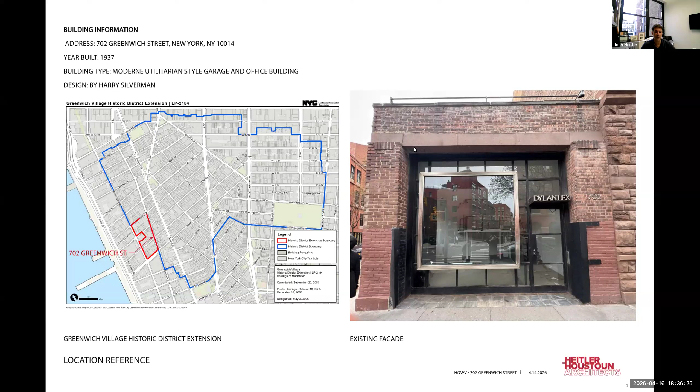is intended to be more historically and contextually sensitive and coordinate more with the existing details of the building, as well as providing security to the new tenant, which is a jewelry store. So they have some requirements on size of lights and other things that's part of their security program. And we're going to walk through a couple of the elements and the precedent we looked at, looking around the neighborhood to try to ensure that this would be more historically and contextually accurate.

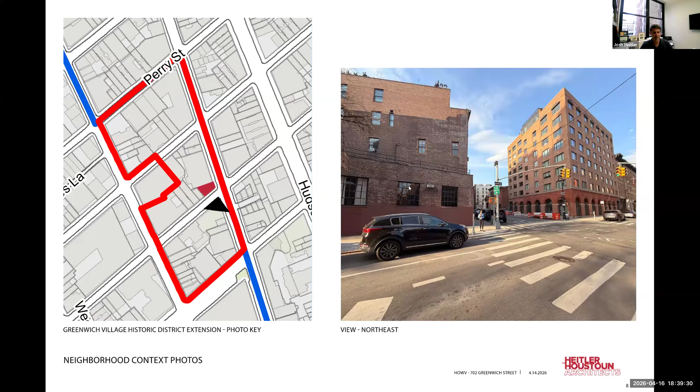Again, the facade we're talking about is around the corner here, but this is the side of the one-story building, which also has multi-pane black metal windows. And then this is looking away from the property down the block for context.

And again, we started to look at similar conditions in the neighborhood. So this is the immediate neighbor. The subject property is in red. This one we're looking at here in black is 708 Greenwich.

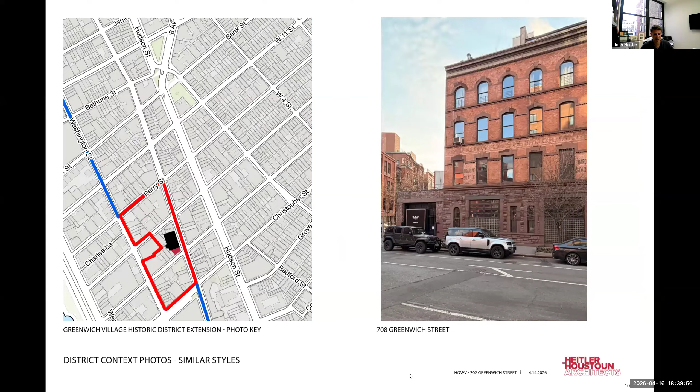And here's a close-up of their infill treatment. They're using a combination of multi-pane glass block.

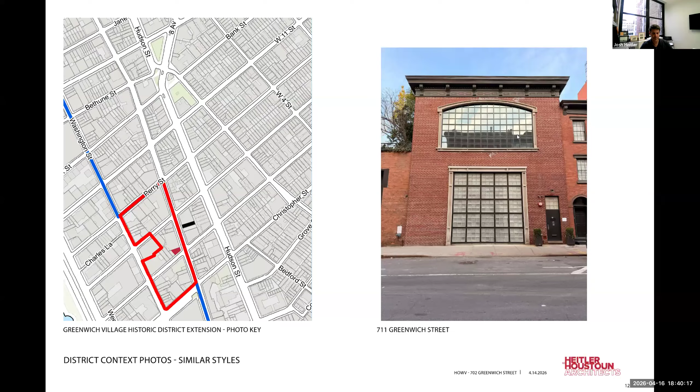This one is across the street. They have, again, multi-pane glass block. In the upper section, they have a very similar treatment of multi-pane storefront. And that's just a close-up of their infill. This is a couple blocks away, but of similar condition as a one-story multi-pane garage infill.

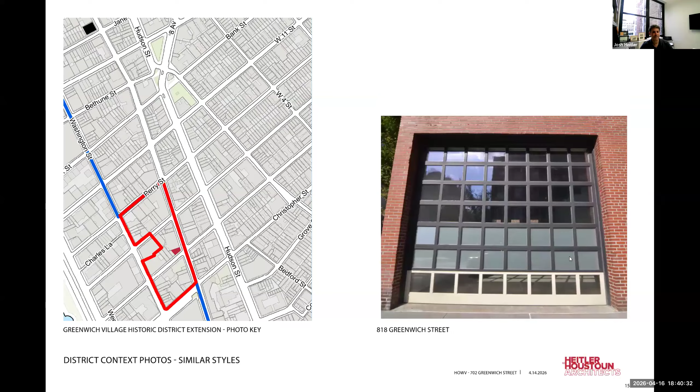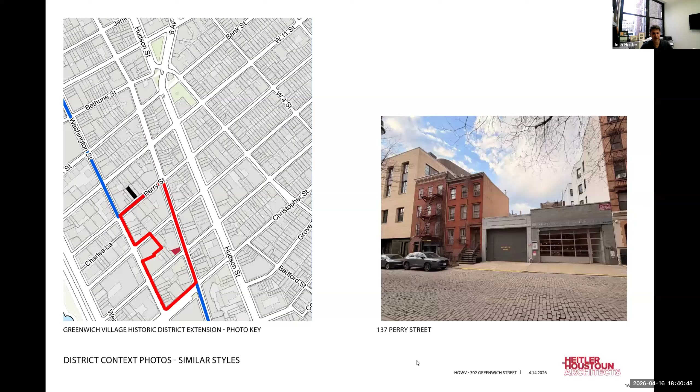And we also looked in the neighborhood for garage-type facades that had pedestrian entrances incorporated into them. So this is around the corner on Perry Street. You can see here, I think we have a close-up, that it's a garage-type storefront with an incorporated pedestrian door.

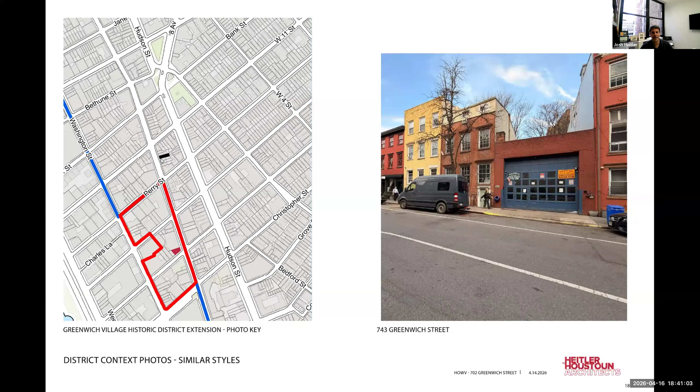And a similar condition exists, I believe. This is further up Greenwich over here, 743. This is an active garage, but it too has a multi-pane facade and an operable pedestrian door within the pattern.

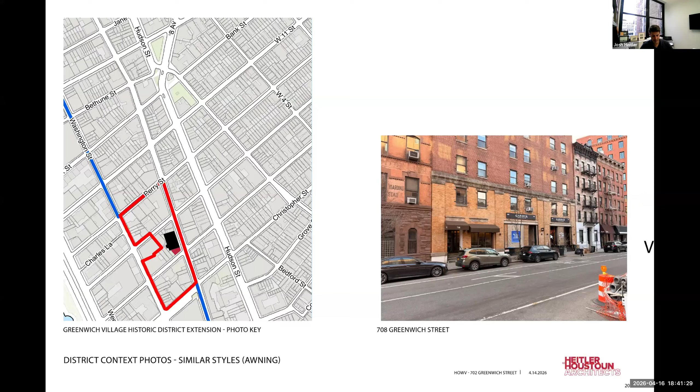The other piece we wanted to look at were awnings. The owner is also wanting to do an awning here. So these are the adjacent properties on the block, several simple fabric awnings up the street at 708, and further down the block at 716 and 718. Close-up of them.

This is a plan of the tenant's portion of the building. There's an apartment to this side, but this is the tenant space. And then here is the proposed storefront and door shown in context and plan.

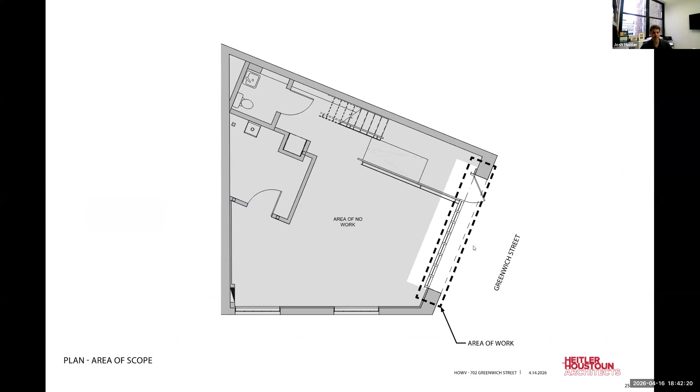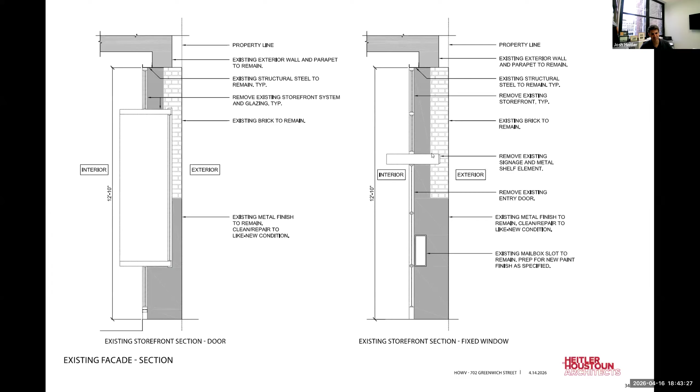Some of the details, again, this is existing, which has this sort of large picture window element and these projections. And then the proposed, which is much simpler and flatter and sits back from the historic opening.

And then this is shown with the proposed awning. The awning also is within the opening and set back so that it minimally protrudes past the face of the existing building, actually more or less aligns with the existing building. So very much within that existing opening.

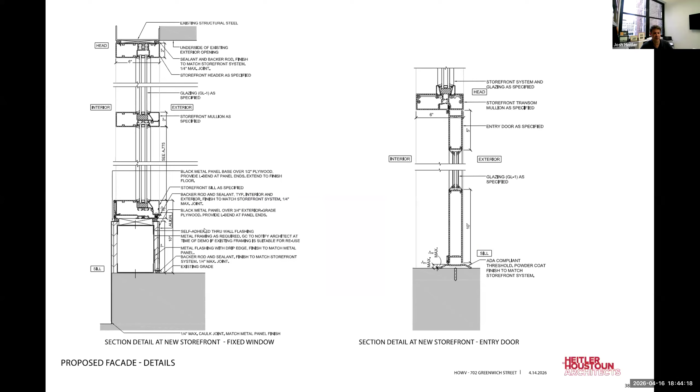Some more detail on the awning. These are some construction details of the new storefront system. We are keeping the existing structure that frames it on three sides, four sides, including the bottom, and just building the new storefront, replacing it sort of one for one.

Some more details here as well. Finally, our intent is to remove the existing deteriorated storefront that we don't feel is particularly historical or contextual, and replace it with something that preserves the existing opening, but is more historically appropriate and more contextually sensitive, that also meets the requirements of the tenant. Any existing elements to remain will be repaired in place and preserved.

That's it. Okay, thank you.

Could you go back to the awning, please? Certainly. Let me just—this one? Looking at the section, how high is it and how far does it extend from the building? So the bottom of it is 9 feet off the ground, and it doesn't actually extend past the face of the building. No, the height of the awning itself.

The height of the awning itself is 3 feet 10 inches. I didn't hear clearly—3'10", I'm sorry. How high? I didn't hear how high it is. The awning is 3 feet 10 inches.

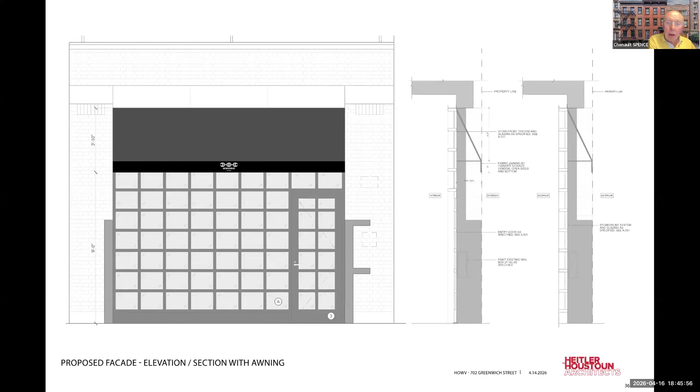And it extends to the edge of the building. It's about 18 inches per the projection, but that is the same amount as the building. Going to the side view, it starts at the facade at the new storefront line and ends at the base of the building, so it's inset, as it were. And it's fixed, I gather. It is fixed.

From the committee, are there questions? Anita, do you have any questions? Yeah, I have two questions. One is the glass mirrored? No, the glass will have a security film on it, but that security film will be clear in nature.

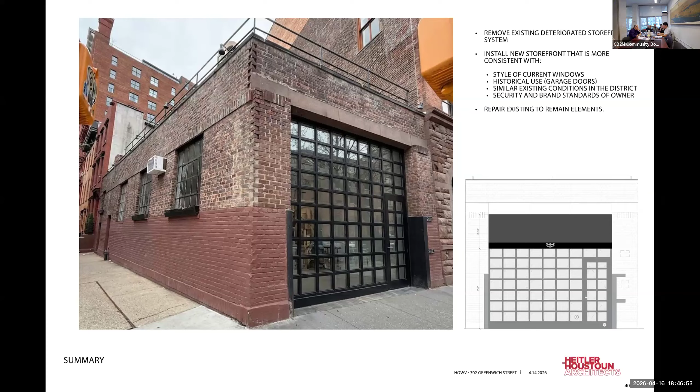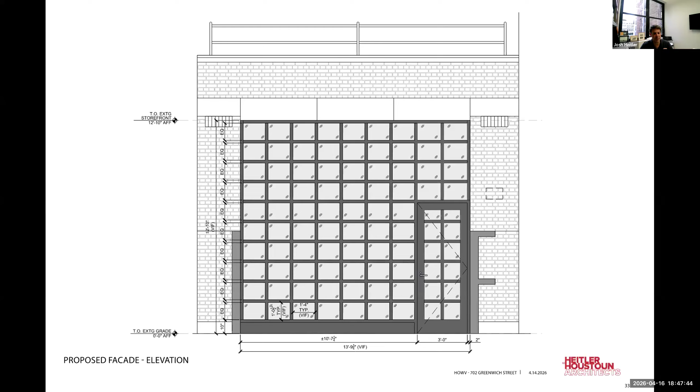And the size of the divided lights, where did you get that size from? They're kind of horizontal. The size is they are a little over one foot high and about 16 inches wide. That came from a couple of things. One, we were trying to meet the security requirements for the tenant—being a jewelry store, the idea is that even if you somehow break the glass, these would remain and be at a size that was not easy to fit through. And we looked more at the garage doors we had seen in the neighborhood in terms of that proportion, and they were mostly horizontal to square. I can go back and find some of them, like these ones. These were very horizontal, but I think most of these we found were horizontal to square, so that's what we were sort of echoing.

I have a question, which is: is there any illumination of any sort that's part of this application? No, there's no proposed illumination.

I also was going to ask the same question about the mirror quality—can we just assume that this is a function of the render, and that whatever this clear film is does not have any additional reflective property? Yes, correct. This has been a concern of Landmarks as we've been working with them. If we're able to gain your approval today, we'll go in front of Landmarks in early May, and they've asked for physical samples of the film because they have the same concern. They've said in the past that they've approved clear security films, so this is something that exists. We're hoping there's a solution that works for both the client and Landmarks, and we understand yours and their concern that it not be mirrored or reflective.

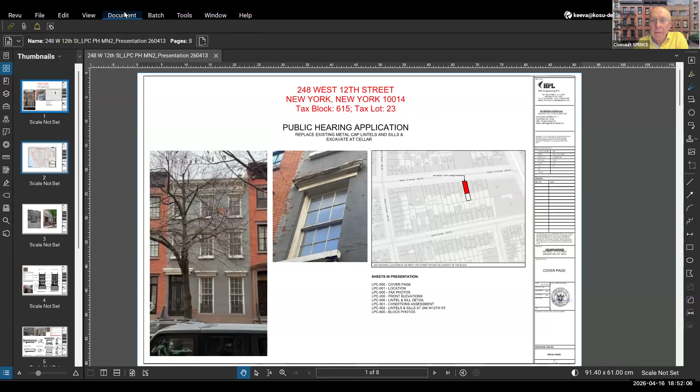Okay, that should be showing for everyone now. We see it, thank you. Okay, perfect. Hi, good evening. My name is Keeva O'Sullivan, and I'll be presenting today on behalf of the building owner at 248 West 12th Street. Excuse me, can you make the picture full size? We're getting thumbnails. No problem. There we go, thank you.

My name's Keeva O'Sullivan, and I'll be presenting today on behalf of the building owner, Carlos Saavedra. Our application today is short, and it addresses the replacement of the existing metal cap lintels and sills at 248 West 12th Street.

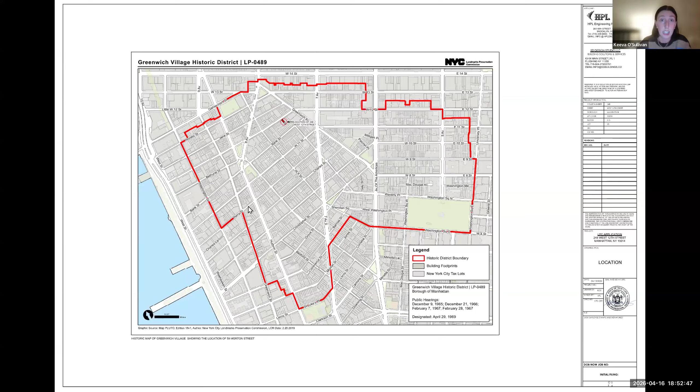As many of you are aware, 248 West 12th Street is located in the historic district of Greenwich Village. Here we have a map of the neighborhood showing the location of our property, up in the top north of the map.

I will also note at this point that we have already received LPC approval to remove the paint from the front facade, so the proposed brownstone details will complement the newly revealed brick nicely and support the wider restoration of the front facade to its original conditions.

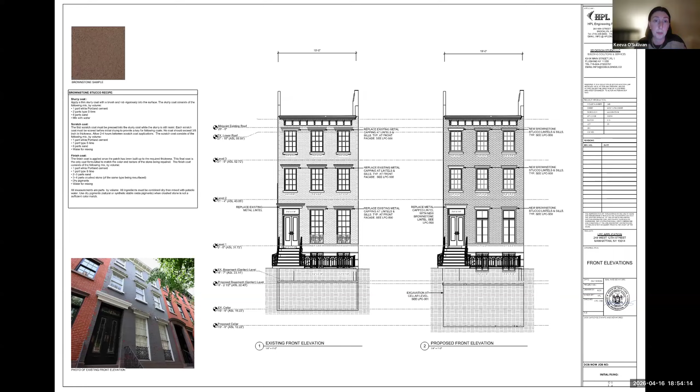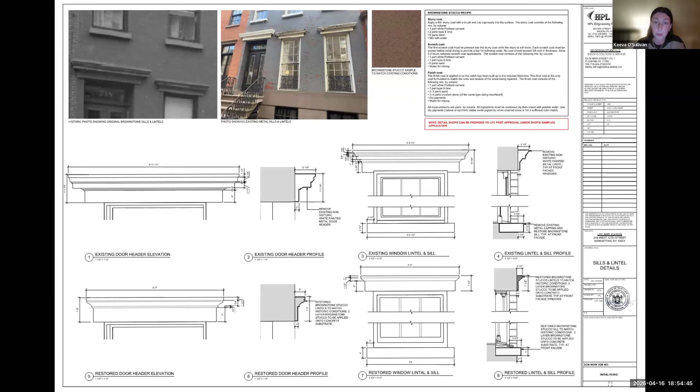I will emphasize that we did carry out a thorough conditions assessment of the existing metal cap lintels and sills prior to making any proposed amendments. As you can see from these photos, the existing metal caps show severe wear, particularly evident on the lower floors, where you can see considerable peeling and delamination of the paint.

With that, my presentation is concluded and I'm happy to take any questions.

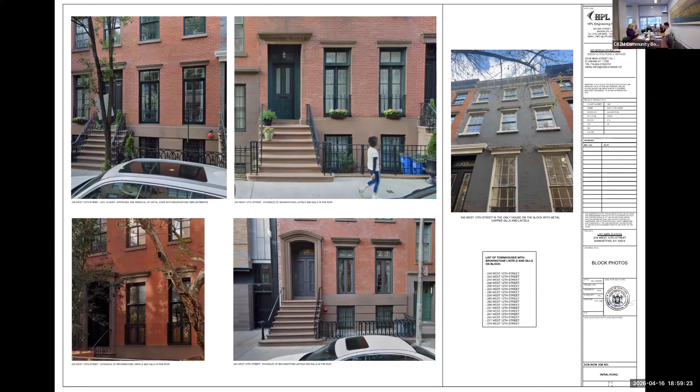The next application is 639 Hudson Street, to replace all existing windows, reclad the penthouse, straighten a wall on the roof, relocate 3 chimneys, and remove the roof deck.

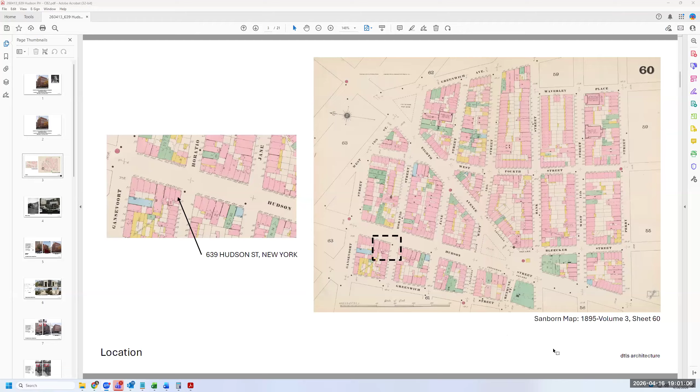In the 1940s, it was a parking area. In the 80s, it was a maintenance garage. But more recently, in 2003, Landmarks approved the proposal for a new building. It's 4 stories with a penthouse, and it's a mixed-use building.

What we wanted to focus on today is the top of the building. When you look at the building today, you can see there's a parapet cap and a visible penthouse clad with stucco. You can also see some of the mechanical ducts, which are visible as you move north on Hudson Street.

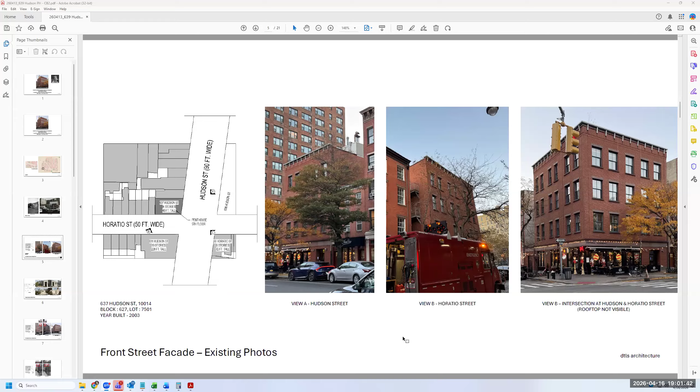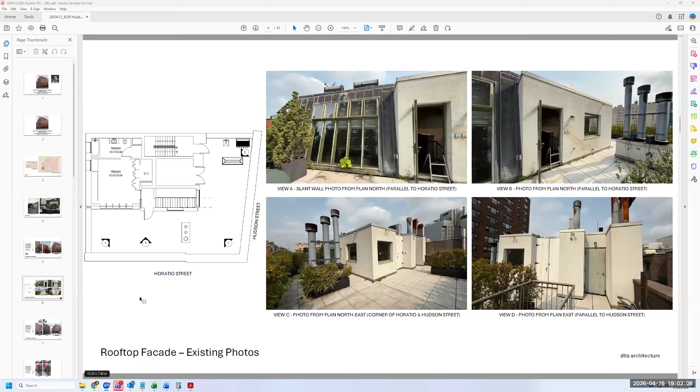Zooming in on the actual penthouse itself, it's a patchwork of different materials and openings. There's very little design intent to the way it was arranged, and it's fallen into disrepair. As you move around the deck, there are 3 chimney stacks which break up the continuity and flow of the deck itself. We wanted to create a proposal that creates order and rationality to the roof of the building.

We prepared a full-size mock-up, which is still visible today. If you see what's been built in the mock-up, it's only a modest change to what's visible from the street, so you really have to go down Horatio or up Hudson to see any of the modifications we're making.

When you go further east on Horatio, it still shows how little visibility you get of the bulkhead penthouse. Could you increase the size of these individual pictures? Of course. Is that better? Yes, please, thank you. Of course, and let me know if you want me to go back on any of them.

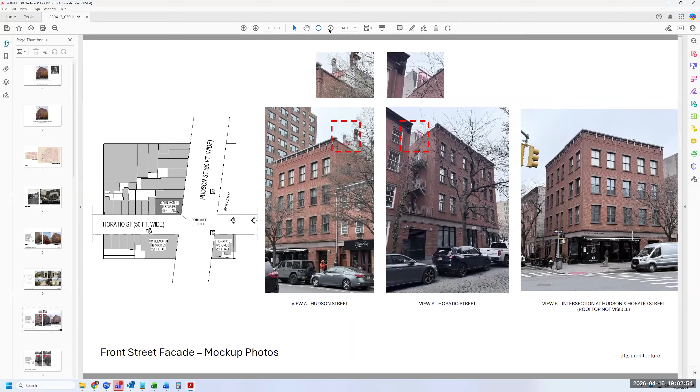If you look in this image, you can see that our proposal is only slightly accentuating the existing penthouse. I'd also like to reiterate that we're not changing any of the heights of the penthouse.

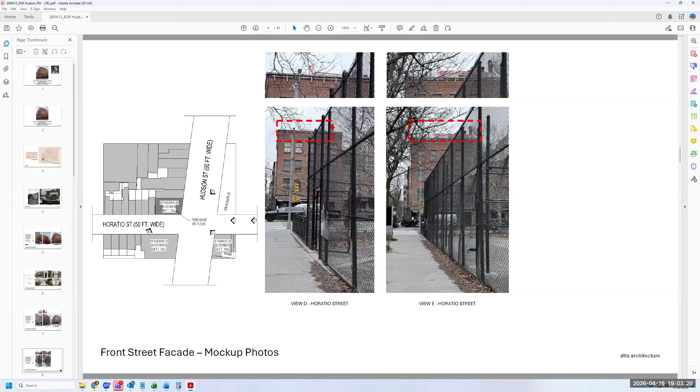When you move east on Horatio, you can start to see some of the chimneys, which are sort of floating in the middle of the roof. You can see some of the proposal, which we're placing on the east facade of the penthouse.

It's a more substantial difference when you get on the roof itself. What we're trying to do is create a more rational system of openings and geometry. By moving these 3 chimney stacks closer to the penthouse, it creates a more consolidated massing while making the chimney stacks even less visible from the street.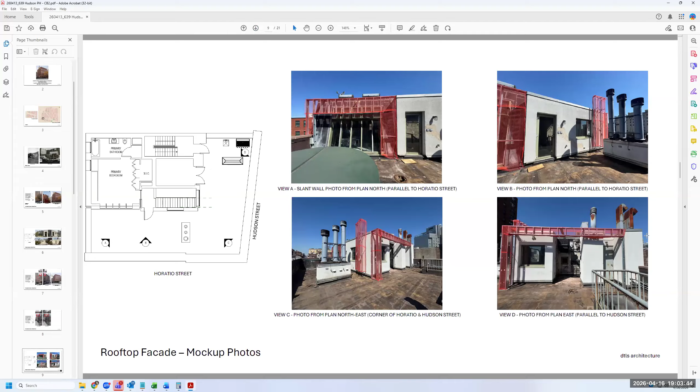We'd like to confirm that when you're standing directly across Hudson Street or Horatio Street, you do not see any of the penthouse. It's only when you go further east, north, or west that you can start to see it.

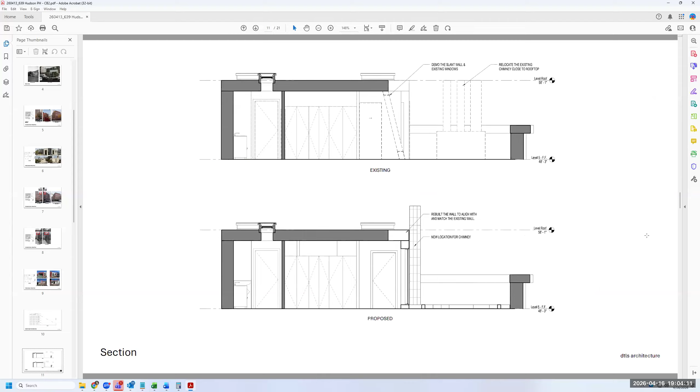Looking at our geometry, we wanted to create something more rational and practical, and also to have window openings that are more consistent with the rest of the building. By doing that, we were able to create new window openings and also a cladding system which is more reminiscent of the industrial heritage of the area.

Most importantly, moving these chimneys over creates less of a visual block between the east and west portions of the deck. We didn't want to end there though. We really weren't happy with the material of the current penthouse, so we wanted to find materials that were in the same rich heritage as the meatpacking in the West Village. We ended up using porcelanosa materials in oxide brown and Tourmalet black because we felt it would reinforce some of the industrial heritage of the site.

The other thing we wanted to do was create a sort of rational intention to the way the penthouse is designed. Right now it's a chattered line, and there's very little concept or intention to the way it was made outside of the practical realizations of making the space work. Our proposal is to create a sleeve that runs from west to east and creates a more unified facade when you're looking at it from within the upper deck or from outside the building.

Sorry to interrupt - if you go back one slide. While we're here is a good chance to get this: the actual size and footprint is not changed, and the only thing you're doing is pulling the skylight out and filling out to the existing wall line, the replacement window.

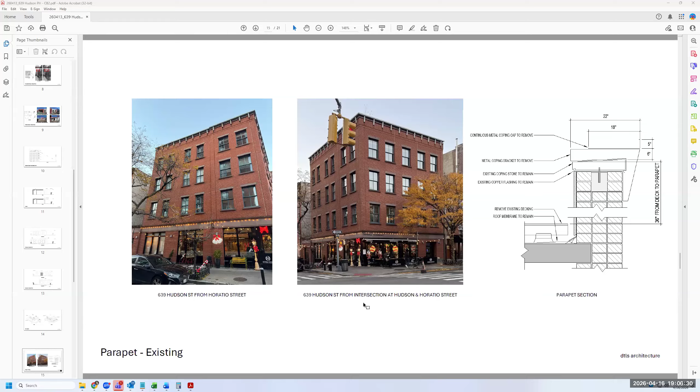The other item is that there's a metal parapet cap. I'd like to reiterate that this building was built in 2003, so it doesn't have any historic significance, and at this point the parapet cap has fallen into disrepair. Our intention is to remove it to create a more clean brick facade, as these images reinforce.

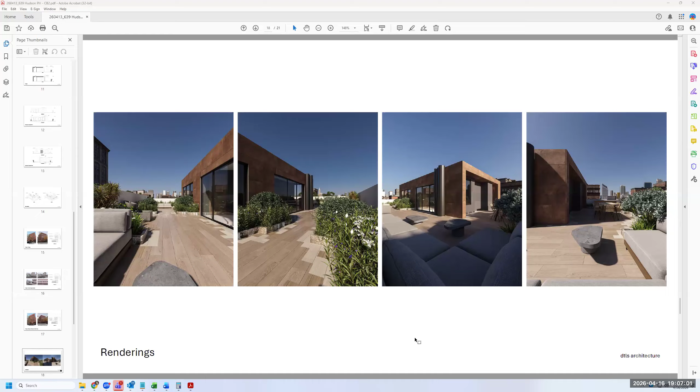The last and most important thing was to create a design that really has value for not only the building, but for the neighborhood as a whole. We feel that by reskinning this penthouse, it'll actually add more to the history of the neighborhood, as well as creating a more rational design that won't be as awkward to look at when you're in an adjacent building.

The material palette we've chosen was really pulled from the history of the neighborhood, but we also think this is a durable material that won't require as much maintenance and won't have the same wear and tear issues as some of the existing materials on the penthouse. Our window scheme is pulled from the window openings below so it'll have more consistency rather than haphazard openings currently in place.

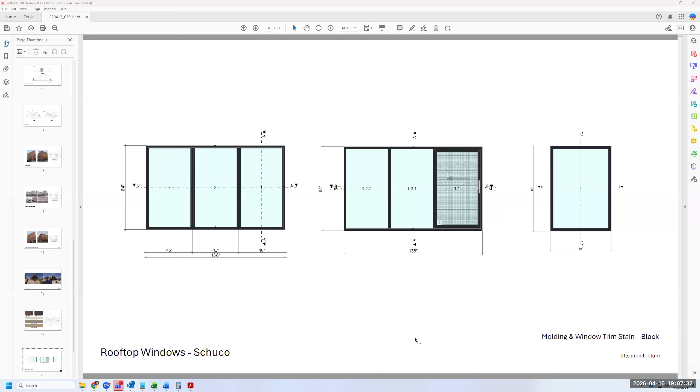Our overall intention is not to make a dramatic change for the building, but just to create something that's cleaner and more organized. We really love this neighborhood and we're really appreciative that you gave us the time to present. Thank you so much.

Okay, Susan, I have no other questions. You have no other questions? Okay, thank you for your presentation. Anybody on the committee have any? What's the material on the roof decking?

That's a great question. While Landmarks doesn't have much of a say in what we're doing, we still wanted to create material that was indicative of the concept for the roof. So we're going to be using pavers in three different materials, all cement pavers, but with different wood looks - some more bleached out and some with a more natural finish. They'll be sleeved together to create a filigree on the floor of the roof.

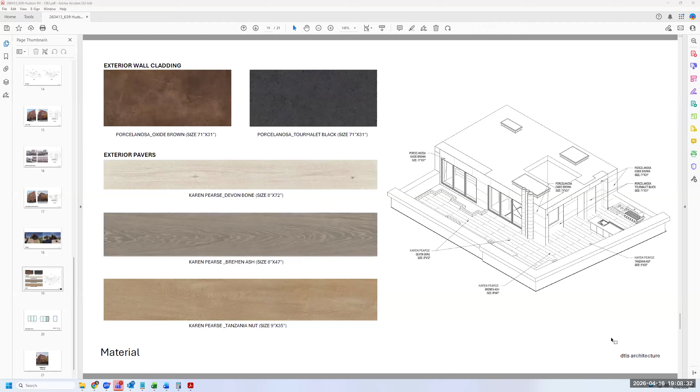Thank you, Mr. Barrick. I appreciated the presentation. I like that choice of the exterior wall cladding that you're showing there. I think that would be very effective.

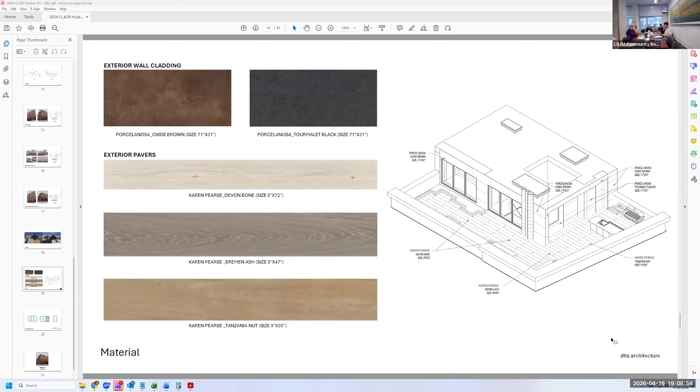My one question is about the coping and taking off that embellishment of a faux fascia. It's going to leave just a very thin line at the top of the wall, and I'm a little concerned about that. It seems like it's even thinner than the window headers, and that doesn't seem to be the right proportion. So I'm wondering if that top coping stone or material could be thicker to emphasize the top of the wall.

Actually, I think that's a really valid point. We've been working with our Landmark staff representative on how to approach this. We knew we were going to have to do repair work on this stone layer because the metal brackets are attached. So I think there's value in putting a thicker parapet cap around the perimeter of the building if we're replacing it. It would give it a bit more scale and proportion, and tie in with the other buildings a little better.

By the way, is that bringing the level up to the required height for a railing? That's a great question. Right now it's already over, so even if we removed it using the existing parapet cap, we'd still have an appropriate amount of guardrail height. And is it being kept for some design reason?

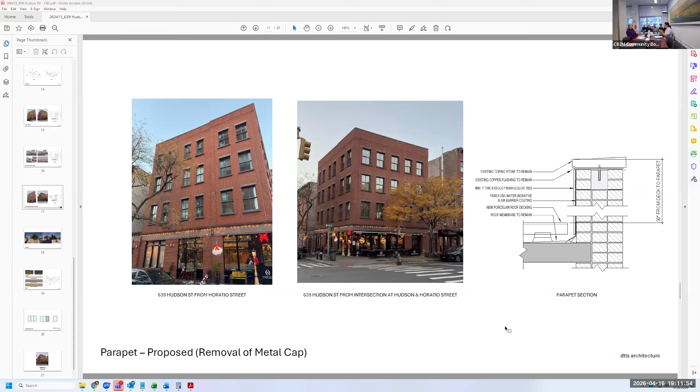Yeah, I just wanted to second what Brian was saying about the metal parapet. It does look a little odd without it, like the top was just removed somehow. Looking at neighboring buildings, what it maybe is trying to do is reflect the classical cornices in the neighborhood. So I would also call that out as something that doesn't really seem to match either the original building or the neighborhood.

Yes, on the same point, it looks bare. It just looks bare, like it's lost its cornice. We're sad when we see that because it doesn't celebrate how the building meets the sky, it doesn't give you a shadow line. So aside from removing it, which I can see is causing a lot of problems, I wondered why we couldn't get a new cornice that's easier to take care of and maybe more traditional.

This was kind of out-of-the-box thinking with the space and all of that. But you're saying it's a post-war building, though it wasn't designed to reflect that era, it was designed to fit in with the West Village massing and materials. So I would prefer if there was something new added back.

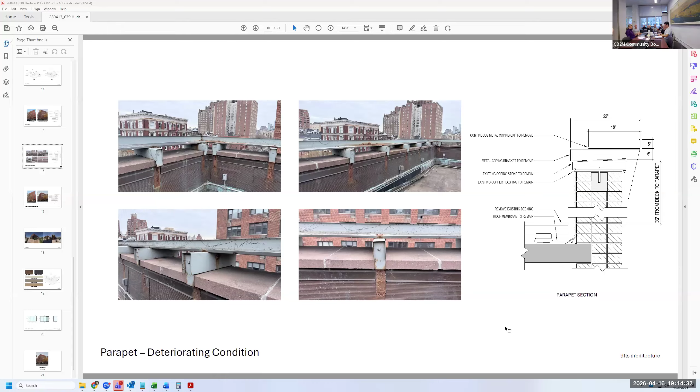Okay, thank you. Brian? Well, and likewise, we would also thank Laura for spending her time, energy, and talents rendering service to the community. Thank you. Yes, we all agree.

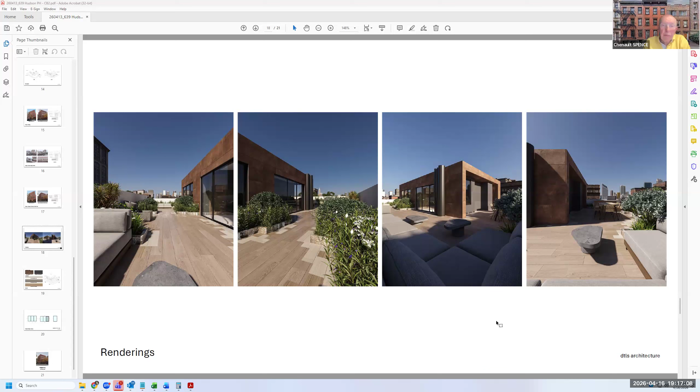The next application is 675 Hudson Street: to remove the billboard and construct a rooftop addition, modify the ground floor openings, and construct an exterior vestibule, and install new multi-light windows and louvers.

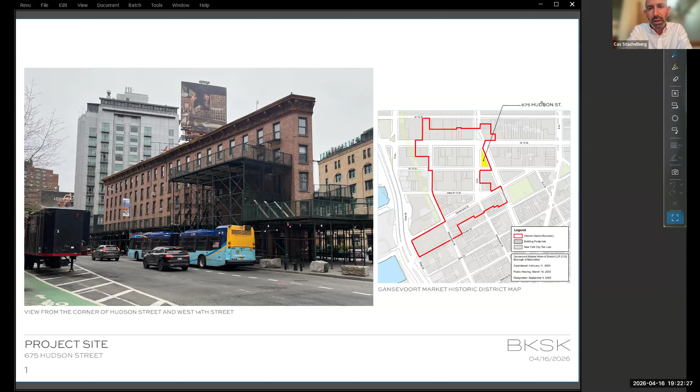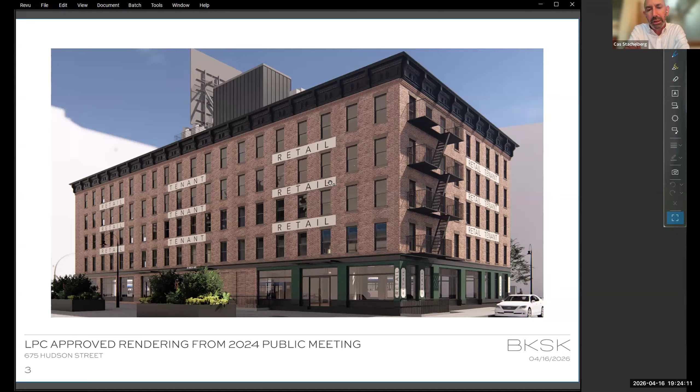Looking at the main volume of the historic building, as I mentioned, there's extensive restoration across all four facades, restoration of the cornice and removal of the billboard, and construction of a metal and glass rooftop addition with mechanicals and elevator bulkhead down to the south end, by the Gansevoort Hotel.

The design is really very much tied to the history of change in this district and supporting this new use. As you know, the district, since its designation in 2003, has been seen as this sort of design district in many ways, and the commission has regulated this district differently than any other historic district in the city. The designation report really acknowledges the differences that took place at the buildings in this district, particularly this notion of adaptive reuse.

Since the second quarter of the 19th century, buildings adapted to support new uses, whether market uses or other more contemporary uses seen in the 19th and into the 20th century, as well as this last phase of development the designation report speaks to, a sort of nightlife and vibrancy in this district that didn't exist when it was perhaps more of an industrial use. So this district has a different quality.

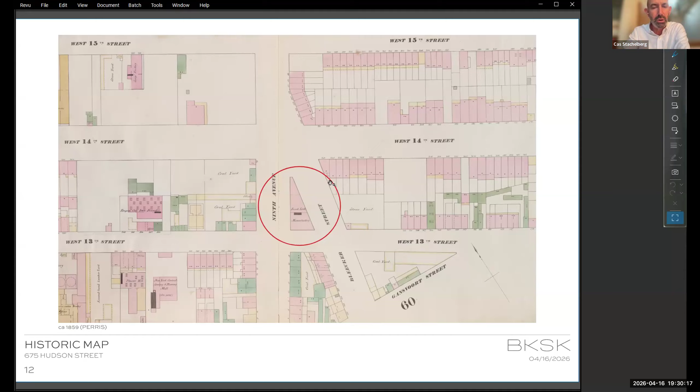A map from the 1850s shows the building in its complete form as it is today. We include this to illustrate the way the original building was detailed, sitting between a residential scale neighborhood to the south and east, with small scale, probably federal style houses, and an increasingly industrial neighborhood to the west with coal yards called out. But it seems, in its design and articulation, to almost have a domestic quality in its original detailing. Next slide.

Sorry, just getting rid of that. Next slide.

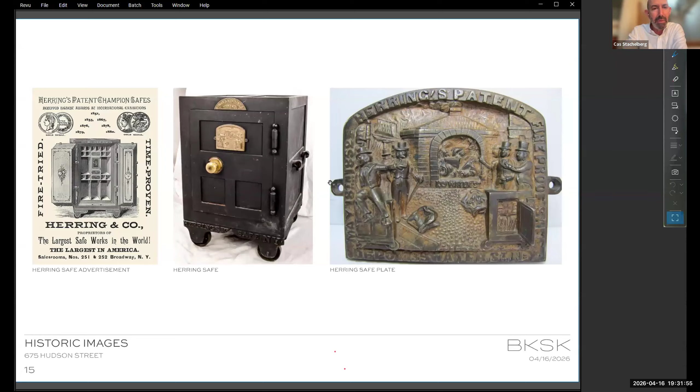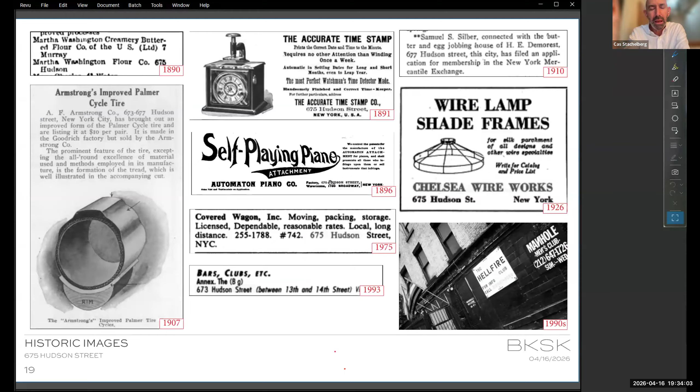Next slide. And then before I finish and Todd picks up, the designation report for the Gansevoort Market Historic District is a fantastic document. It speaks about the phases of evolution in the district and breaks down from the early 19th century to present day into four phases: the early development—conversion of residential scale buildings to industrial and market uses—the Gansevoort market phase, where buildings in the district were in service to the Gansevoort market just to the west, the meatpacking district, and then this last phase of development, the 1970s to the present.

It's not 1970s to 2000, it's to the present, and that's an indication of how the commission has thought about this district. It is an evolving district. It doesn't have an end to a period of significance; it continues to the present. And the commission has regulated the district and changes to it with that in mind. We include that photograph of 837 Washington Street to symbolize that.

Let's go to the next slide just to illustrate how the commission has looked at additions to buildings in this district—obviously very different than the district directly to the south in Greenwich Village and districts elsewhere in the CB2 area, as well as throughout the city. So, significant additions: this is one of the first additions in the district at the Diane von Furstenberg headquarters over on Washington and 14th Street. Next slide.

On 9 to 19 9th Avenue, this addition on this large scale 2-story brick parking garage. Next slide.

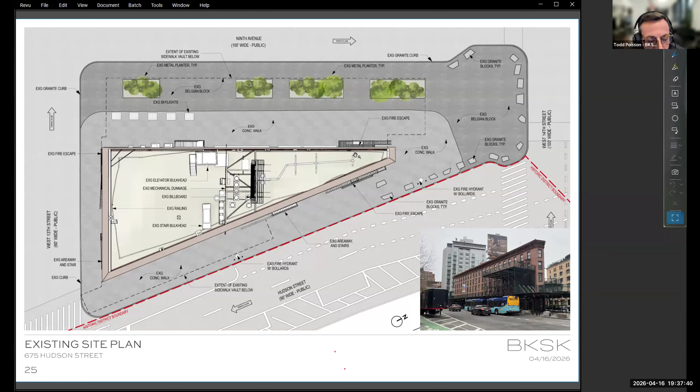The proposed conditions, rendering on the right, with the proposed roof plan showing our proposed scope from above: a metal and glass rooftop addition held off from the inside face of the restored cornice, the proposed new cornice now surrounding the full building, and the elevator and mechanical bulkheads anchoring the roof plan to the south.

We'll talk more later about the proposed sidewalk level scope in detail, but here you can see on the 9th Avenue side new retractable awnings on either side of a new proposed entry vestibule. You can also see shaded white on the Hudson Street side and elsewhere new sidewalk areaways in historic areaway locations.

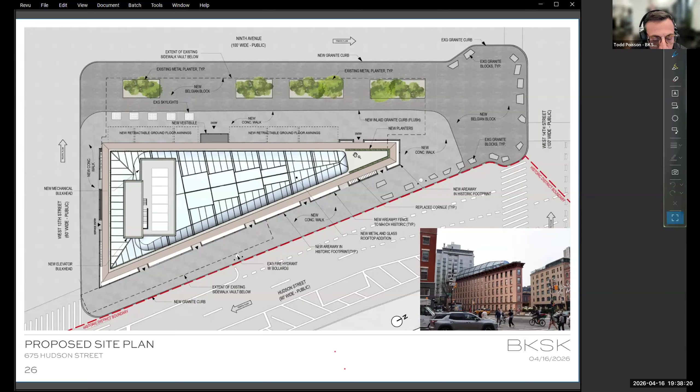All the windows are replaced, and among them are several louvers behind simulated double-hung window frames. The louver locations are the darker shaded windows under the cornice line at the north end. You'll see those on other elevations as well.

Similar items here to note on the Hudson Street facade. Again, we'll show more detail later about the proposed ground floor scope on all 3 major facades and how it recalls the building's 19th century condition, with areaways and a variety of windows and doors. Shown at the roof is the long eastern flank of the roughly symmetrical glass and metal bulkhead rooftop addition, and at the northern tip of the roof, powder-coated metal planters. The existing fire escapes are to be removed.

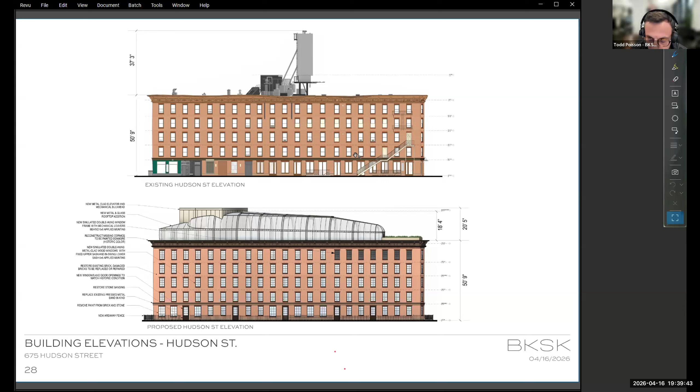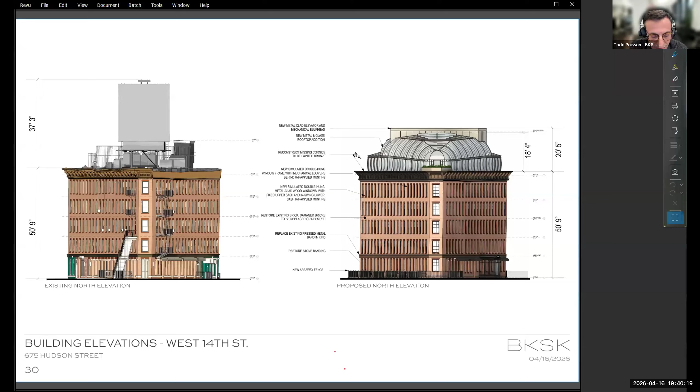When seen in pure elevation from the north, the rooftop addition's form can be seen to have been generated by the site's geometry, with the nose tapering down with triangular glass panels. You can also sense how the rooftop addition's glass volume billows out and curves down to that roof line, helping it visually separate itself from the base building.

Although not in the district, we've been inspired by historic metal and glass rooftop construction elsewhere and the tradition of enclosed rooftop garden spaces, such as the 19th century Casino Theater roof garden on Broadway. A signature space of Annabel's London, in fact, is the rooftop garden, and the rooftop space of our proposal aims to offer a similar signature space.

Now we'll walk around the building. The top existing conditions photo includes the mock-up of the rooftop addition, and the rendered street view is on the bottom.

Our intention for this reborn building is to really create a new symbolic gateway to the district with this restored landmark building base and an elegant glass enclosed roof garden on top.

The spacing and rhythm of the structural arches for the dome and metal details at the glass are drawn directly from the window spacing below, as well as from the staggered nature of the cornice brackets and panels.

And that cornice detail echoes in the ladder-like horizontal metalwork in the glass, which stitches the lower zone of the glass enclosure to the vaulted glass roof above, and also marks the top of the stair bulkheads at the south end.

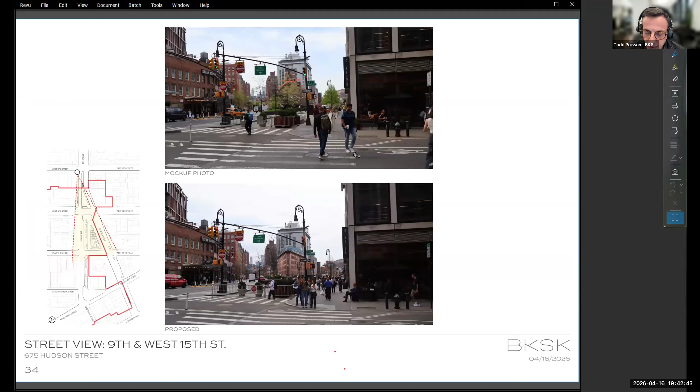From the north, where you can really see the sense of the triangular nature of the site and how it generates the form above. Zooming in a bit on that view, there's a small occupiable roof terrace at the northernmost tip of the roof behind the planters.

From the northeast, you could see the tapered form of the roof in section. The metal details along the long sides of the addition echo historic district details of elevated rails and other rooftop elements.

On Hudson Street, replacing the billboard with a tapered silhouette.

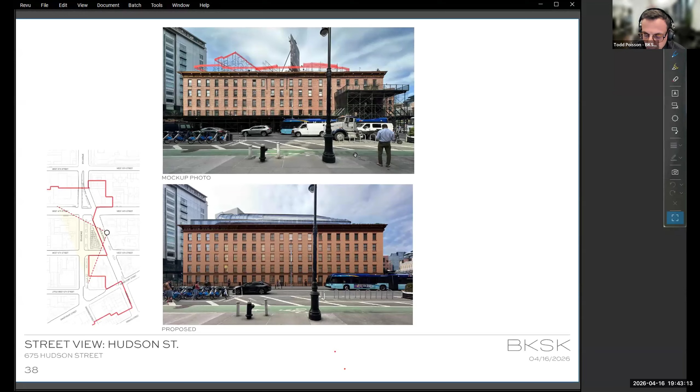So the building behind our backs, Cas alluded to this, is residential. We really like how the 19th century factory ground floor of 675 Hudson had an almost residential scale to it, with divided light windows and areaways and entry bridges over the areaways, creating almost residential rhythm to the facade facing a more residential area.

And so that's what you see here across the street. From the southeast, you can trace the metal work of the glass addition around the corner, connecting the two southern stair towers in that same glass language.

We're going to zoom into this corner, the ground floor corner, in a minute. But again, on the roof, here's the stair bulkheads terminate at each of the southern corners behind the glass, and the glass wraps at their top with an enclosed glass enclosed lookout in between.

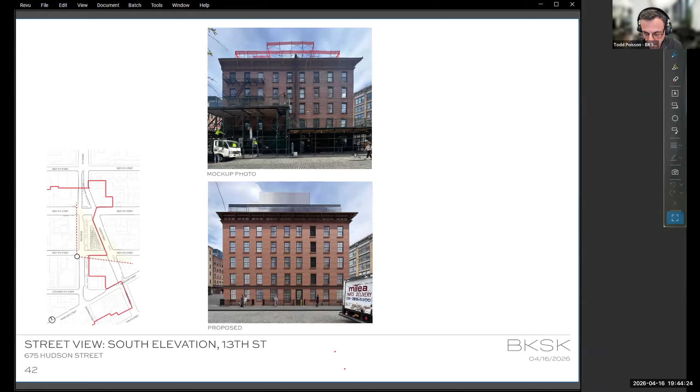On the south end, seen from across 13th Street, the ground floor recalls its 19th century window pattern and location of the service door. And the rooftop glass roof line indicates the top of the stairs and the elevator lobby, allowing visitors up on the roof, allowing them views out from that level before they turn to the rooftop.

Into the rooftop garden space. Those rooftop visitors to the roof then turn toward this corner and then turn into the rooftop space, which propels them north towards the tapered end.

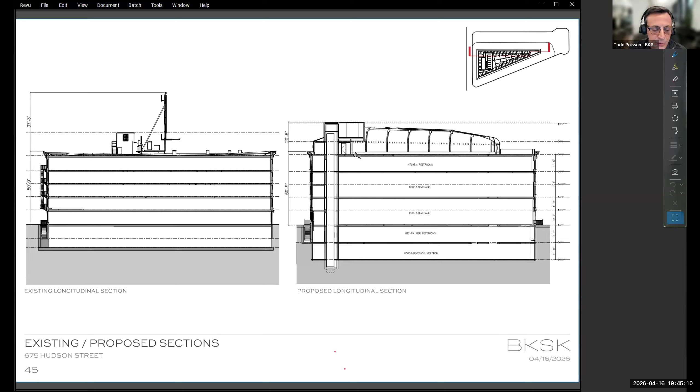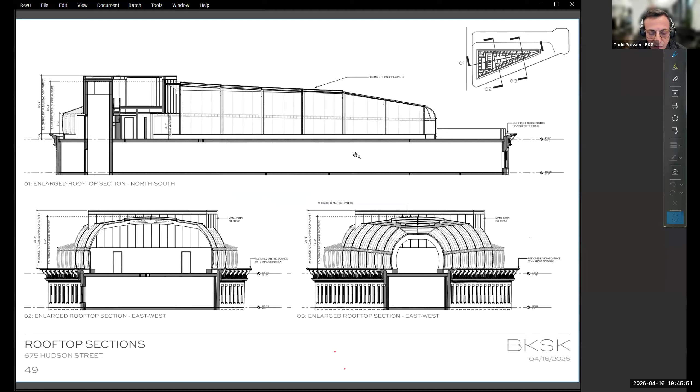The primary structural arches carrying the glass are 16 inches deep and 4 inches wide, tube steel arched members. There's an 18-inch wide gutter zone between the glass and the inside edge of the restored cornice for storm control and maintenance.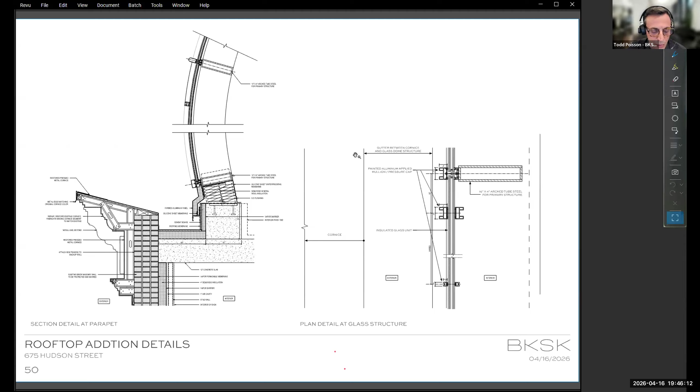Now we want to return to the ground floor and describe how the building hits the ground among those proposed sidewalk areaways.

The proposed Hudson Street ground floor elevation features the restored areaways and areaway fences, interrupted by bridges to the ground floor at intervals similar to the 1850s factory ground floor condition, with infill brick restoration to create the masonry openings of the 19th century, or similar to that condition.

We're also proposing a replaced painted metal cornice at the second floor around the building, as Cass pointed out.

Also at the ground level of 9th Avenue, we're proposing this same idea of recalling the spirit of the 1850s character, with a mixture of smaller windows aligning with those above and some slightly larger windows. In this case, 5 doors respond to the new food and beverage program within, and a new entry vestibule.

All the new and remaining areaway fences are proposed to be replaced with a wrought iron fence, echoing the historic areaway fence.

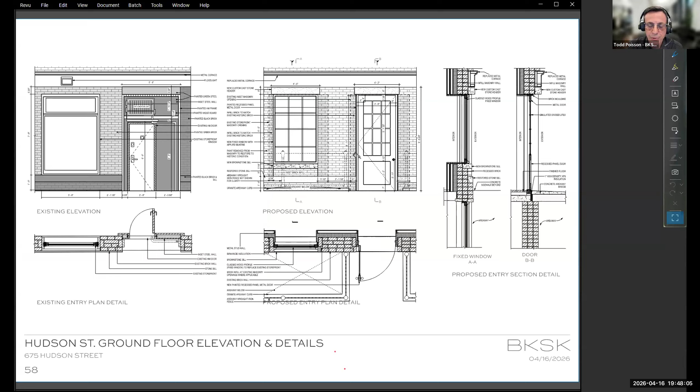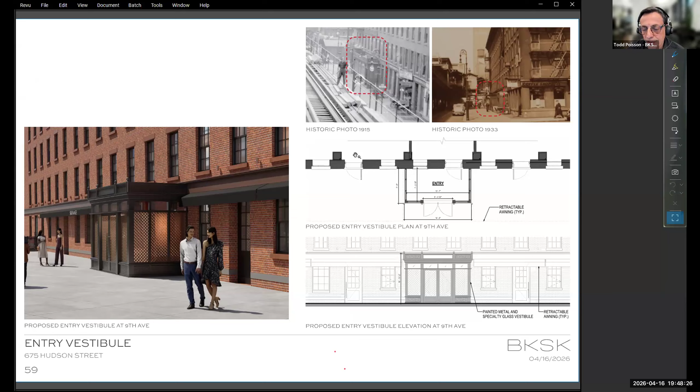The proposed vestibule on 9th Avenue is inspired by early 20th century versions of a sidewalk vestibule at the building, with specialty glass panels within a custom painted metal enclosure, stamped metal base panels, and decorative finials at the roof line with a signboard in between.

These sheets simply document the window replacement program, so we won't dwell on them, but on the left is the existing condition, the middle is proposed windows, and on the right are those windows becoming louvers in select areas. So this is elevation, before and after, and section, before and after.

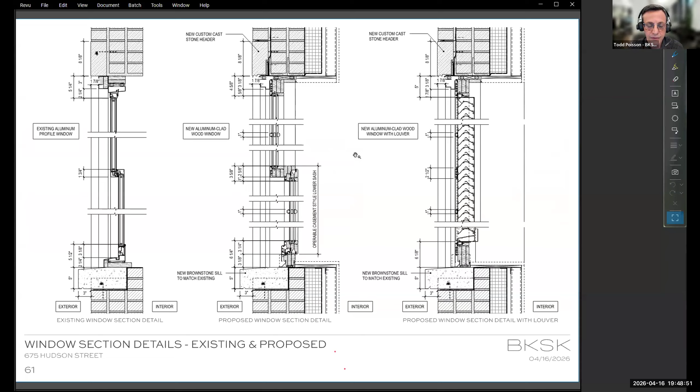And plan details of those two new conditions versus the existing condition on the left.

Along 9th Avenue only, we're proposing surface-mounted light fixture sconces in a dark bronze patina finish, with all penetrations through brick joints only.

This is a collection of materials shown in all the views we've shared. We could come back with questions.

As mentioned, there's a current approval from LPC to remove all the interior structure to support the historic street walls with tower braces on concrete footings. After they're braced, the historic walls are decoupled from the interior structure, allowing the interior to be removed.

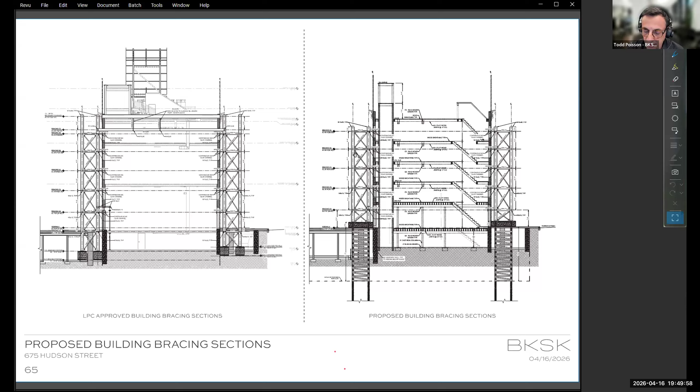Our proposal on the right is a similar approach, but only adding piles under those tower braces, under the footings of the tower braces. Our engineer design partners at Ancora are here tonight to answer any questions related to this scope. These, in fact, are recent Ancora projects that followed a similar bracing approach to allow essentially new buildings to be built behind restored facades.

And lastly, examples of multi-floor height interior spaces in the market district that are behind previously braced restored facades. So we'll leave it here.

In closing, we feel this district has such a strong variety of building types and heights in the surrounding streetscapes that it can support the presence of this visible addition. Thank you.

Yeah, you're muted, Chenault. You're muted. Oh, sorry. You're good now. Sorry, my phone went off.

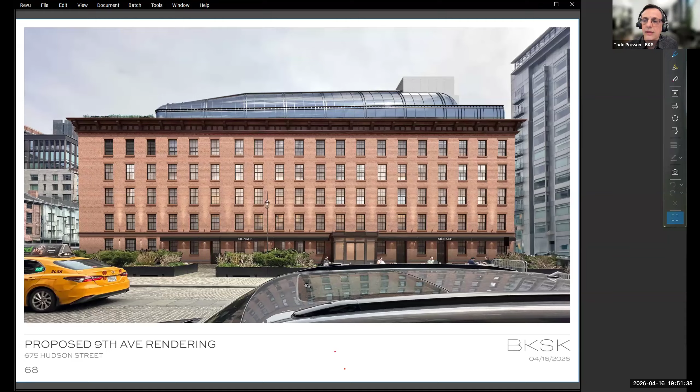Maybe go to the elevations, Tom. You want to go to slide 53? I think it's easier, Chenault, to see it in elevation because there are a series of doors on both elevations. This is 9th Avenue, so there's a fair amount of doors here, and then Hudson. So they both have five doors. They're not super regular, but it's the spirit of that. I'm only going to speak of it generally, not absolutely.

Hello, everyone. Sorry for my creepy lighting here, ignore that. My name is Dina Tasswinter, and I'm speaking tonight on behalf of Village Preservation. Thank you, Chenault, and members of the committee for this opportunity. I'm going to speak tonight specifically to the rooftop addition. Village Preservation strongly opposes this proposed modern rooftop addition. We find it to be completely out of scale and out of context for the building, its setting, and for the historic district. That's really for a few reasons.

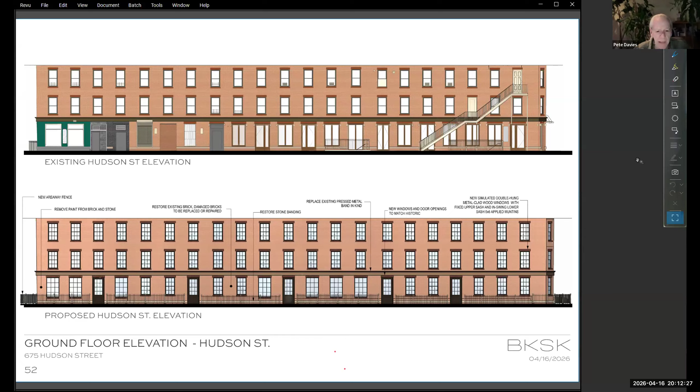If you could put up slide number 38, that'd be appreciated. Right now the building reveals the sky, you see how the building meets the sky. The addition disturbs that connection, and in many ways, the very interesting but inappropriate glass structure on the roof just interrupts the existence of how this building sits in this location.

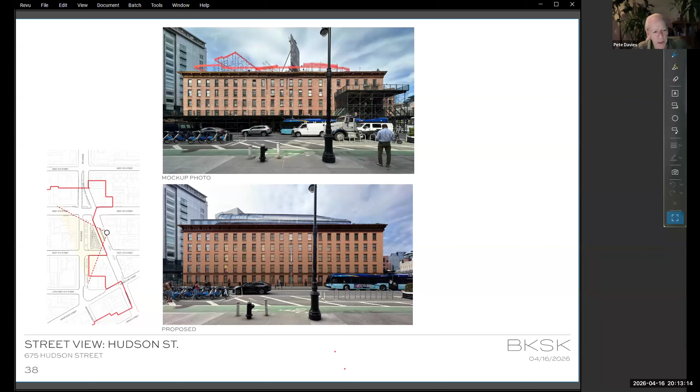And if you could put up number 48. I don't know that it's been commented on much, this retractable roof and how that will act, what that will do when there are club patrons inside. It seems that the glass, it's been commented that the sun during the day will bounce off. The committee should look at what happens with the light inside through the glass addition at night, and what happens when the roof is open, the noise, the sound, the infiltration, the impact on the existing local community. So hopefully you'll look at all that, and thank you very much.

Thank you, Pete. If there's anybody else, okay, Janice Figueroa please. Yes, hi, I'm Janice Figueroa. Can you hear me? Yes, thank you. I live at 345 West 13th Street.

I'm an owner here, and I agree with my neighbors that, of course, this is an important historical building, but I do not agree with the rooftop addition. I think it subtracts from the importance of the building, and it doesn't fit with the context of the neighborhood at all. So I just wanted to lend my support to GVSHP and to my neighbors to say I do not support this proposal. Thank you.

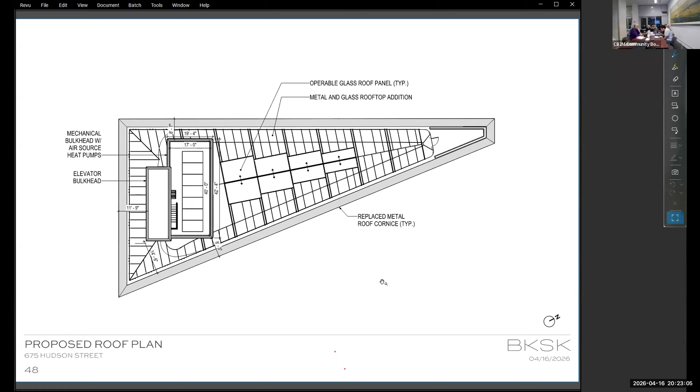The metal clad windows, they look double hung, but they're not, is that correct? Correct. Could you describe how they operate, and if they swing in or out as a casement? Sure, so they are simulated double hung, but the lower sash is an in-swing casement. This is for much better energy efficiency than traditional double hung windows. So it appears like a double hung from the outside, but when operated, the diagonal dotted line indicates operation - that's an in-swing casement, but just the lower sash. The upper sash is fixed.

And just for context, Anita, this is a new detail that the commission and staff have seen quite a bit now and are approving regularly on a wide range of projects - we have an individual landmark on Madison Avenue, projects out in Governor's Island. Is this very limited in the amount that they can open? Sometimes they're like 4 inches. Sure, there will be limit stops on them.

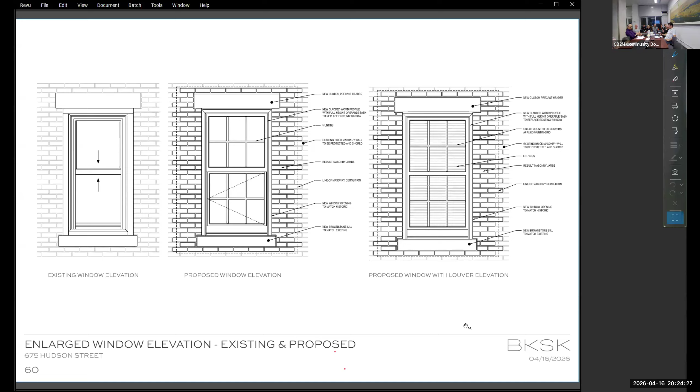Thank you, did you have anything else, Anita? No, well, I guess I had a question about the railings at the street level. Those are historic, correct? Are they being replicated as to what was there? Yes, I know there's a lot on this project so we didn't go into everything. Oh, you have it right there. There you go - yes, the intention is to replicate the historic wrought iron decorative areaway fences.

And there's going to be stairs going down, or is that just an example? There will be some remaining, such as the example on the left, which will remain with a new fence around it. We're proposing at least two new stairs down into new areaways, and other areaways that are just light wells for the windows below. Thank you very much, that's it.

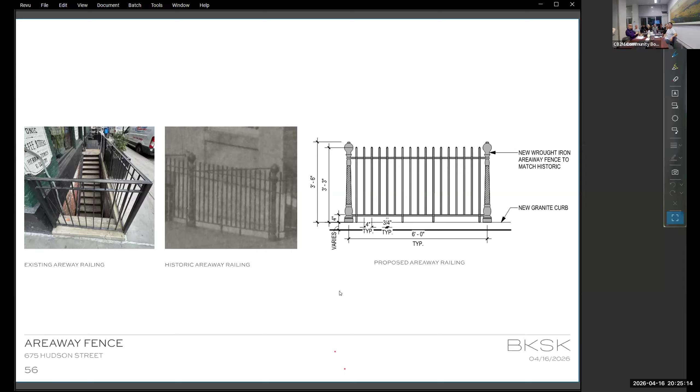Sean Slimini: The original building had a fence and an areaway? Yes. Okay, thank you, Brian.

All right, I'd like to start with some comments and then end up with a few questions about details, if I might. Certainly BKSK is well known in the neighborhood, obviously they've done so many remarkable works.

Our charge is that we do not allow any additions that are obviously very visible, and if in fact that cannot be achieved, that it be minimized by reasonable setbacks and other devices to make the appearance of the addition as minimal as possible. This is obviously a new building starting from 2 stories on the ground.

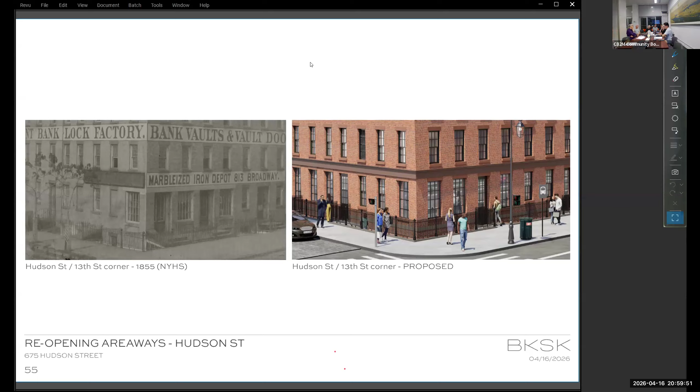All right, Chenault, I would like to bring up one other issue that I don't know how we should deal with in the resolution, but I do think we can't assume that the areaway and the fencing will be approved by DOT. The applicant was very transparent about the fact that it's not necessary, that it's not grandfathered, that the revocable consent on which that depends is not grandfathered. I think that was for the vestibule. Or if we go back to our areaways too, our famous encroachment, they said the row areaways, the bottom step of the row house entrance.

We do a landmark approval, and then DOT looks to us for a separate recommendation of approval. It's a little complicated, there's no committee to look after encroachment, so because we're the obvious one to look after aesthetics, this group, as an advisory group to the board, makes a recommendation for revocable consent, which we routinely do for anything we've approved as a landmark activity. We certainly approve the design of it and whether it's correct for the building. So if we don't feel it's appropriate, we say so on the landmarks level, and then down the road, when it comes to be approved by landmarks and they come for the revocable consent, we say that we don't recommend revocable consent for the areaway encroachment or the fence or whatever it is.